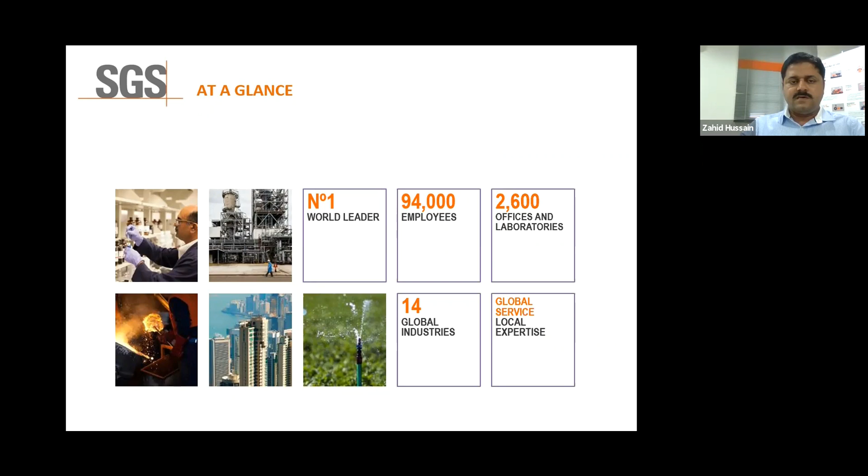SGS started in 1878, initially in the field of grain inspection, and then later on we entered the oil and gas industry, civil infrastructure industry, and other different types of multiple service lines. From 1878, we grew up, and now we are present almost all over the continents.

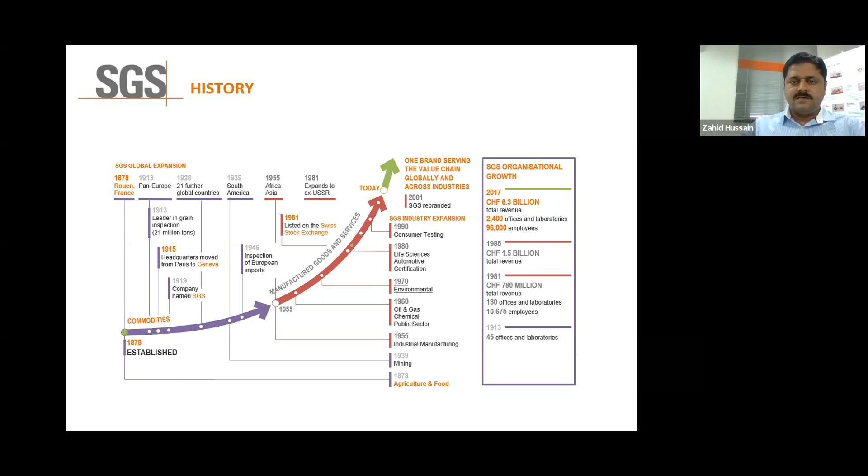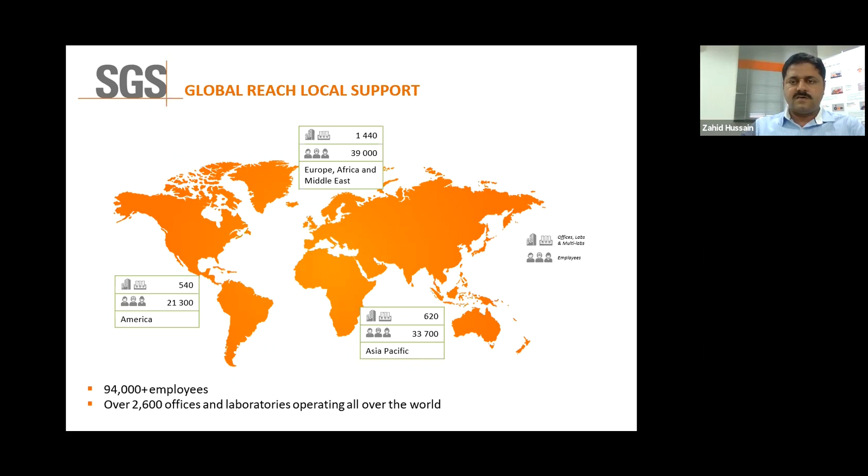This is SGS presence on the globe: in America, Europe, Africa, Middle East, and Asia, Asia Pacific. We have almost more than 94,000 employees working with us, and we have 2,600 plus offices and laboratories.

Our today's topic is our SGS consulting services in health, safety, and environment, specifically with respect to process safety. In SGS, we have hundreds of employees who integrate the HSE team within the environment and industrial division in different countries, covering all aspects of environment requirements, occupational health and safety requirements, industrial hygiene, machinery safety, construction safety, and process safety.

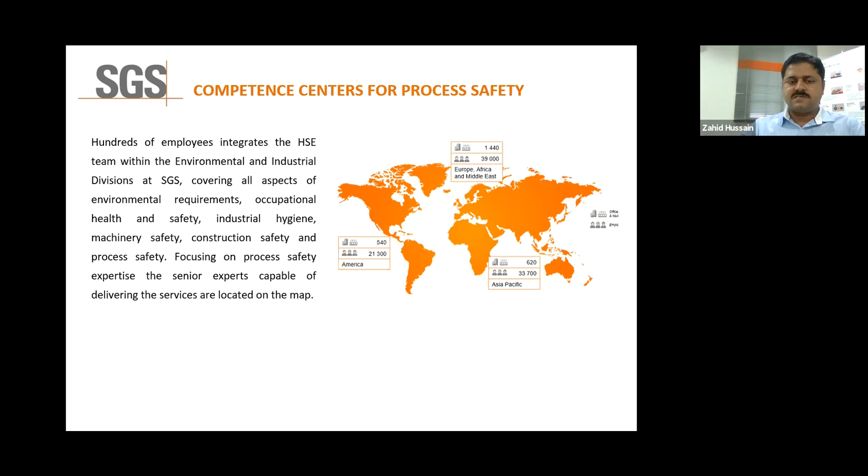Focusing on the process safety expertise, the senior experts capable of delivering the services are located on the map. So we'll start from process safety. So what is process safety?

Basically, in SGS, we provide these services in the field of process operations to prevent and mitigate the risks resulting from the operation of industries where production, handling, storage, and disposal of hazardous substances take place.

Our services cover the overall life cycle of the project, starting from the conceptual design, FEED, detail engineering design, and construction, operational, and decommissioning phase. So overall process safety services cover the entire life cycle of the project, and since we cover the entire life cycle of the project, we have to cover the entire life cycle of safety also. So it's called process safety.

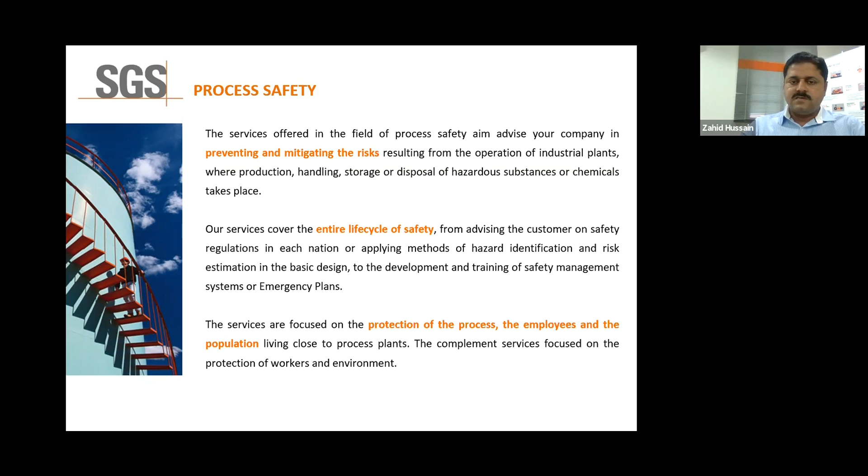Basically our services are focused on the protection of processes, the employees, and the population living close to the process plants or industrial areas. We also have to take into account that the safety of society is considered while performing process safety services.

So this is overall a brief of process safety, which covers process protection, public protection, and worker protection. We start from process hazard analysis in process safety, and for public and worker safety, we have to perform quantitative risk assessment and occupational health and safety services.

There are other multiple types of studies also involved, just like safety cases, emergency response management systems, emergency response plans, consultancy and other services, ATEX zoning, hazardous area classification, etc.

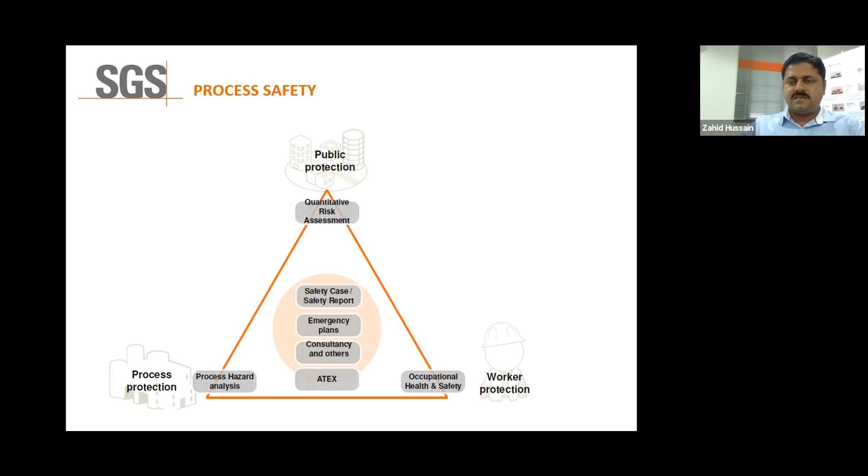Summary of the services in process safety studies: first, as I discussed, is PHA, process hazard analysis, that's like hazard safety studies. Then risk assessment, which involves qualitative or quantitative risk assessment, just like QRA, quantitative risk assessment, IR, individual risk, ALARP, as low as reasonably practicable. So we have to perform risk assessment in both ways, either qualitative or quantitative.

Then safety reports, analysis reports, safety management studies, and safety trainings, etc. And then functional safety, it contains a SIL assessment study.

Basically, safety integrity level study, and spill, dispersion, fire, and explosion modeling, hazardous area classification, just like ATEX and DSEAR classification and verification for dust and vapors, emergency planning, emergency response plan preparation, and obviously accident and incident investigations.

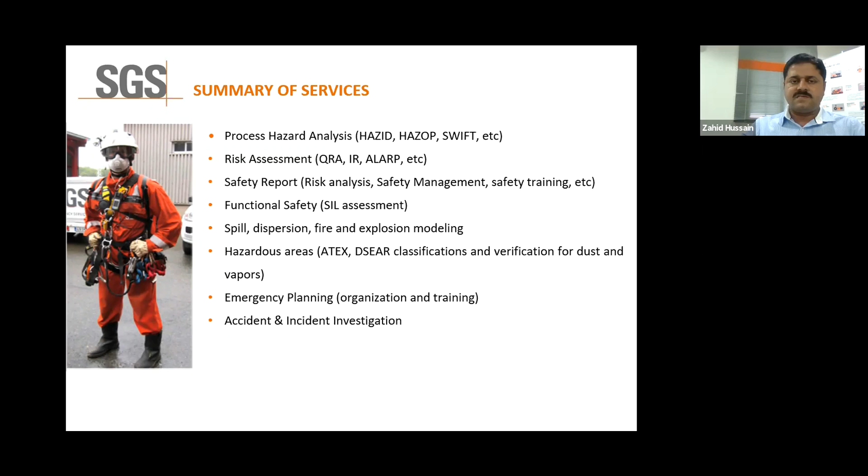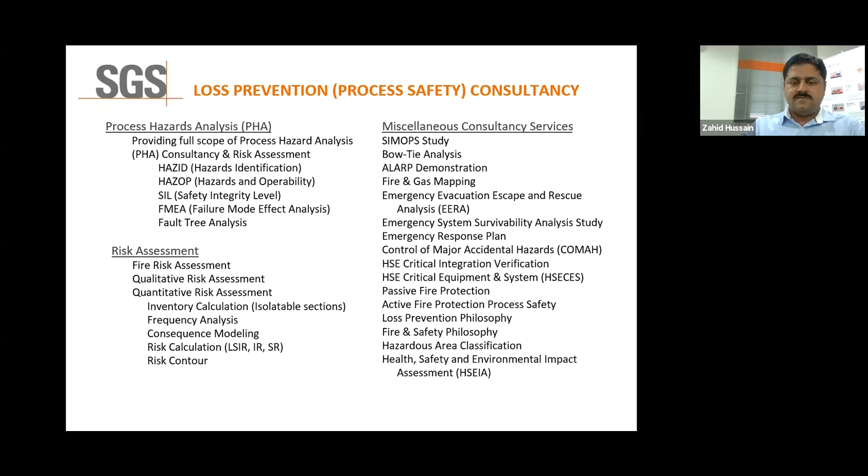This is the overall services of loss prevention and process safety consultancy, as we provide from PHA analysis to risk assessment, and then miscellaneous consultancy services. We will describe each in detail one by one in our today's session.

So first, PHA, process hazard analysis. What is PHA? Basically, a process plant, as you are familiar, comprises many complex systems and components such as instrumentation, controls, safety devices, etc. If all these components are combined together and work effectively, it means your system is sufficient and you are eliminating the hazard.

But in an ideal case, things work as intended. But in an actual scenario, if such components deviate from their intended purpose or design intent, maybe due to malfunction or human error during normal operation, plant startup, or plant shutdown, this can cause or be the reason for potential hazards or risks.

Therefore, there is a need to investigate how the plant responds in such scenarios. If a main component of the plant or system malfunctions, or if any human error occurs, then what could be the hazards or risks involved.

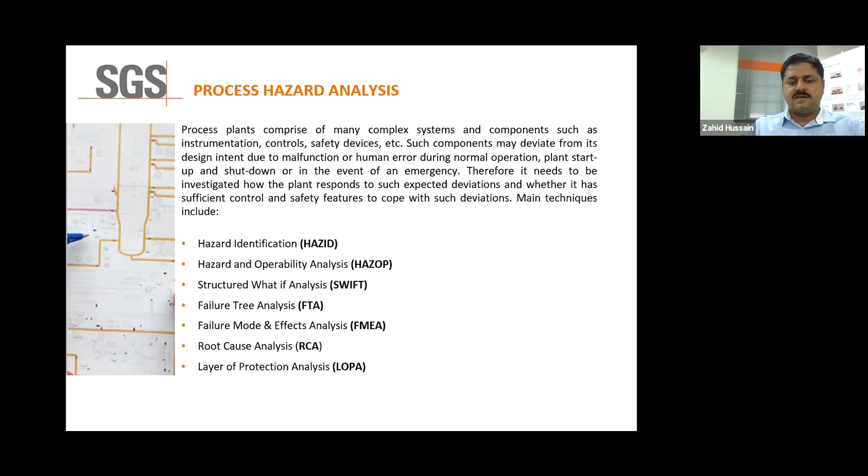In PHA analysis, we perform hazard identification, hazard study, and hazard and operability analysis. Hazard is basically related to operational hazard activity, structured what-if analysis, then fault tree analysis, failure mode and effect analysis, root cause analysis, and layer of protection analysis, LOPA, which is part of the SIL assessment study.

Now, as I explained, what is this PHA analysis study? Basically it is a structured brainstorming technique involving a team of experts covering all aspects of operation and maintenance, instrumentation, safety, etc., of the overall process of the plant.

Either it's in the FEED stage, detailed design stage, construction stage, commissioning, startup, or normal operation, it has to be performed throughout the life cycle of the project, from feasibility and front-end engineering design, then detailed engineering design, construction, commissioning, startup stage, and normal operation of the plant. So why is it to be performed, the PHA analysis or process hazard analysis study?

Basically, it is performed to find the deviation from design intention, to identify the hazard, so that we may know that all the appropriate safeguards are already in place.

There are normal steps for how we perform this PHA analysis study. As a standard protocol, we have to collect all the available information, just like all data, piping and instrument diagrams, PFDs, process data sheets, process equipment data sheets, and operating and design process parameters related to all the information.

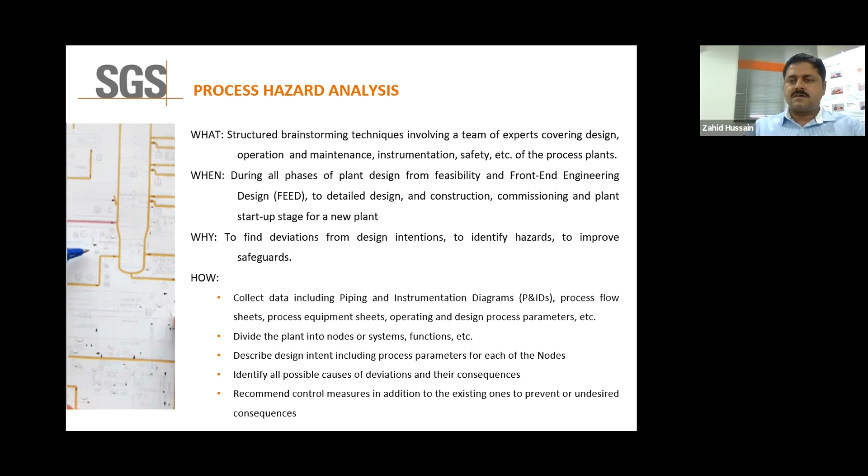Based on those deviations and consequences, we have to recommend some control measures in addition to the existing controls already in place, to prevent the undesired consequences.

And next is the quantitative risk assessment study. Based on the PHA analysis, normally in PHA analysis we perform all the qualitative risk assessment techniques. After adopting the qualitative risk assessment technique, we have to perform the quantitative risk assessment study.

Basically, a detailed quantitative risk assessment study is carried out to guarantee that the population, environment, and facilities protection with homogeneous criteria is being ensured.

So SGS provides the services of QRA studies, quantitative risk assessment studies, by professional use of state-of-the-art software tools recommended by clients, or if those are not specified from the client side, then SGS proposes them by itself.

And calculation according to the most recognized guidelines and methodologies as approved from the client, and then adaptation of local requirements and guidelines as well. And if those guidelines are also acceptable to the client, we have to adopt them.

Then based on the initial calculation, we perform consequence modeling and then frequency estimation according to prestigious databases, just like the Yellow Book or other available techniques, records of incidents or accidents on-site at the client premises if they are maintaining their own database, that we have to adopt. Otherwise, we follow applicable international best practices.

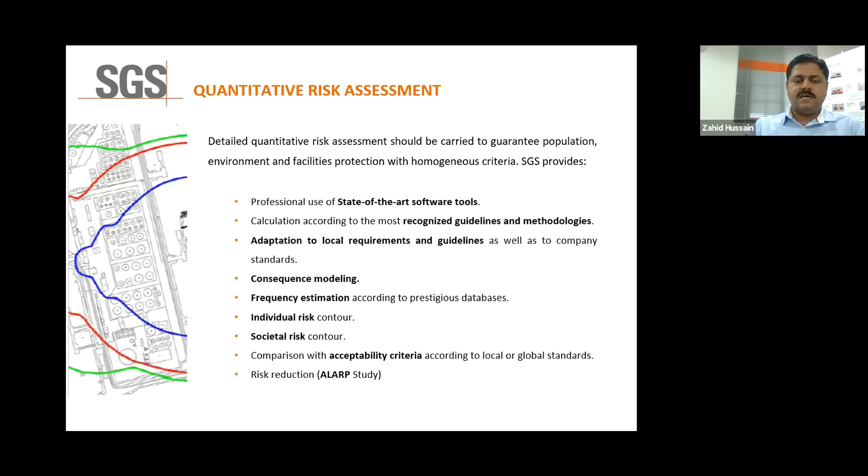Similar to PHA, these questions are normally asked: when do we have to perform the quantitative risk assessment study, and basically what is it? As explained, it is a method used to quantify the risk generated by any industry in case of loss of containment of hazardous substances.

This study is performed during all phases of the plant or project life cycle, just like the FEED stage and detailed design engineering stage. If the plant is in operation, some clients recommend redoing this quantitative risk assessment study every 5 years, because as a standard industrial practice, modifications or developments happen at each plant. That's why detailed PHA analysis and quantitative risk assessment studies are performed again after every 5 years of the previous study, to check if any revamping or modification of the facility has been done, so that safety is not compromised. So again this PHA cycle is performed.

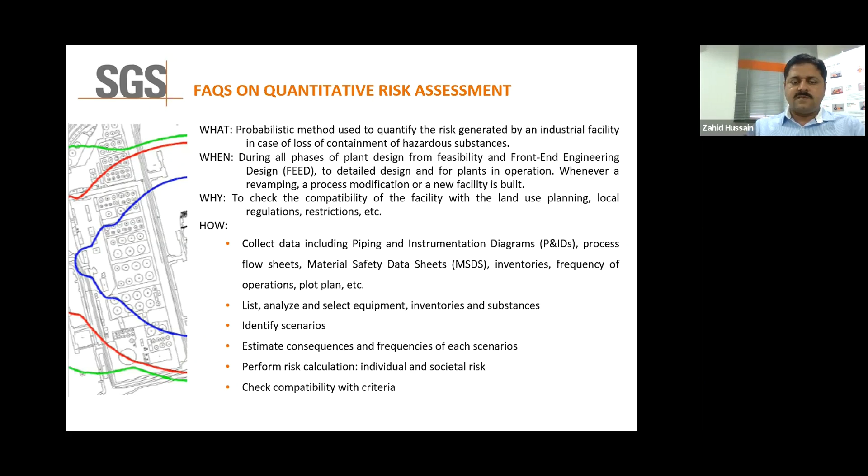We mark the inventory, and based on the inventory analysis or calculation, we identify the scenarios. Then we estimate the consequences and frequencies, such as failure frequencies, for each scenario. We perform the risk calculation, either individual risk or societal risk, and then check compatibility with the criteria defined by local legislation, as well as in line with the client's standard procedures or guidelines.

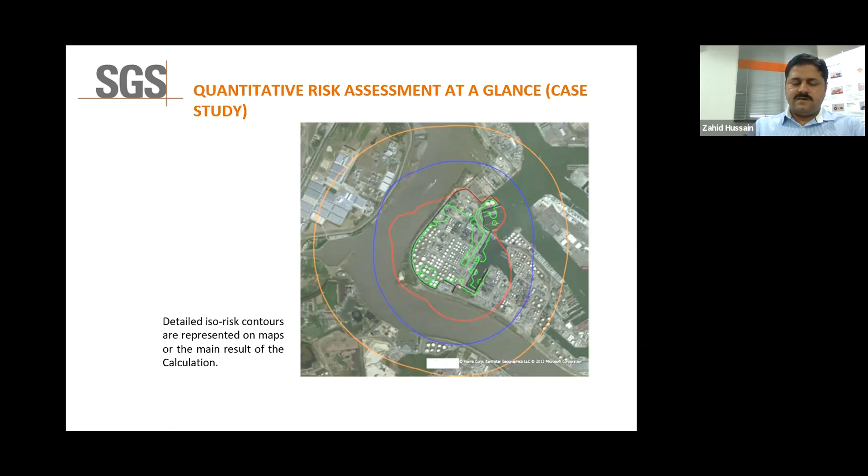About our services: next is the safety cases, safety reports, like control of major accidental hazard analysis. Control of Major Accidental Hazard directives were established and developed in Europe after the disaster at Seveso, which took place in 1976. The plant was located almost 20 kilometers north of Milan, Italy, and they were storing a huge quantity of flammable hazardous material when this incident took place.

After that incident, the government established some guidelines and directives, and based on those directives it's now applicable all over the globe that wherever there is storage or handling of large quantities of hazardous material, we have to perform this control of major accidental hazard analysis study in detail, considering the amount of stored hazardous material.

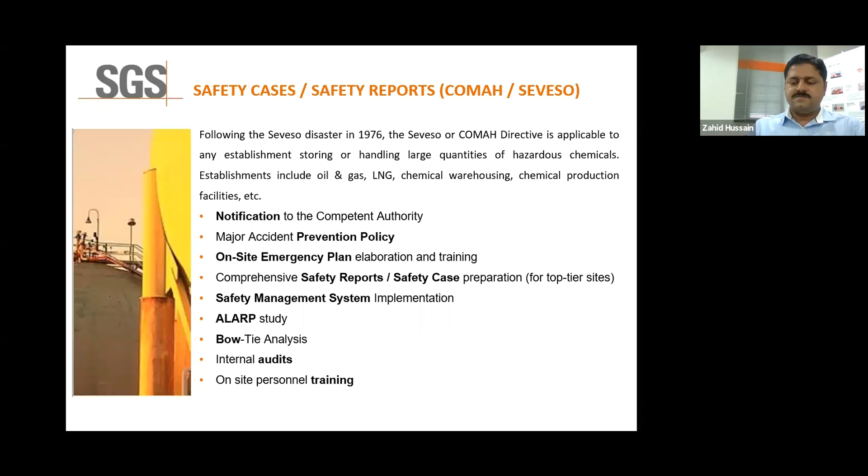Basically, COMAH comprises the PHA and quantitative risk assessment study, focusing only on the major hazards identified during process hazard analysis. Then we perform the ALARP and bow tie analysis of those major accidental hazards, and define the internal audit protocol. If applicable, we perform internal audits and on-site personnel training. So SGS is providing all these services for control of major accidental hazards.

So same like that, when this COMAH study or safety case study is to be performed, basically what it is and why it is to be performed is the same - a method used to quantify the risk generated by industry in case of loss of containment of hazardous substances, considering the major accident hazards. When COMAH is to be performed basically depends upon the local legislation or the client's standard procedures or guidelines.

Just like here in UAE, we are performing the COMAH study of each plant after every 5 years. So after a 5-year interval, it is mandatory that we redo the detailed assessment of all identified major hazards.

How we perform this control of major accident hazards is the same technique - first we have to collect the available information, just like material data sheets and overall frequency of the operation, plot plans, procedures, and then describe and list out the equipment, inventories, substances, identify the scenarios, then consequence estimations, risk assessment, safeguard implementation, demonstration, and then we have to perform the ALARP demonstration.

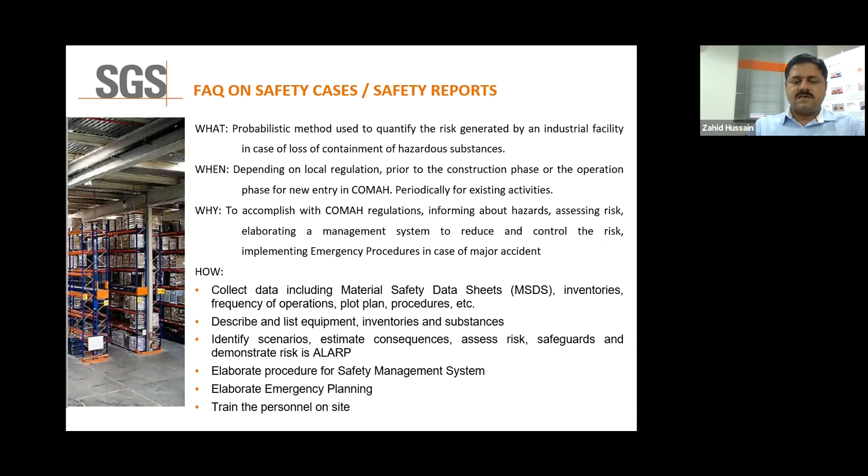Then elaborate procedure for safety management system, emergency planning, and obviously training of the personnel on site.

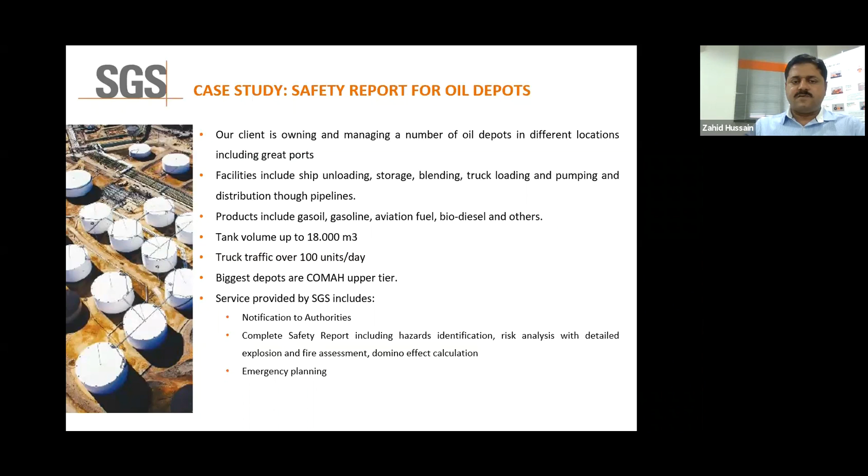Our services included notification to the authorities and a complete safety report, including hazard analysis, risk analysis with loss of containment, explosions, fire risk assessment, and overall layer of protection demonstration. And then we developed an emergency response plan for this site and provided training to their personnel.

So next is functional safety study based on IEC 61511 or ISA 84. Functional safety is focused on the specification, design, installation, operation, and maintenance of the safety instrumented system.

So once we perform this functional safety of a plant, then confidently we can say that we are able to maintain the process in a safe way, because during this study we estimate in detail the overall safety integrity level of the instrumented system, the overall instrumentation of the plant.

So relevant standards applicable are IEC 61508 or IEC 61511, ISA 84, and if locally applicable standards are developed by the client or by local legislation, we have to adopt those also.

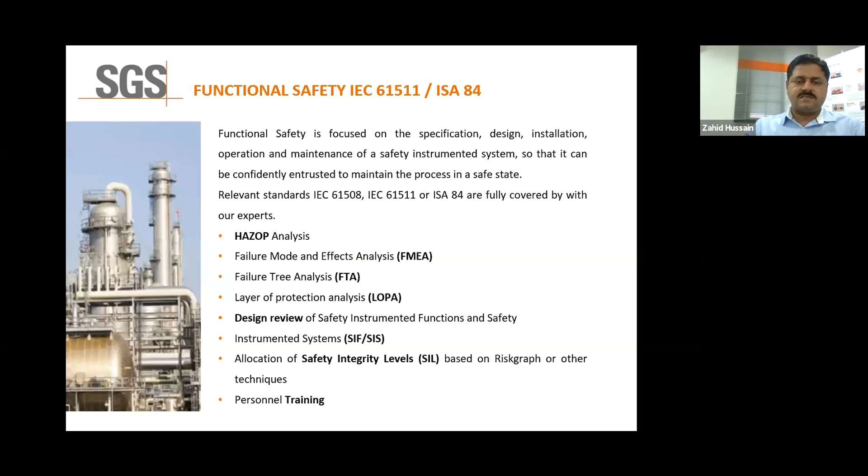For functional safety analysis, we initially perform HAZOP analysis, and based on that we calculate failure mode and effect analysis, fault tree analysis, layer of protection analysis, and then we provide services for design review of safety instrumented functions and overall safety instrumented systems like SIF and SIS, allocation of the safety integrity level based on the risk graph or other techniques as approved by the client, and then again personnel training.

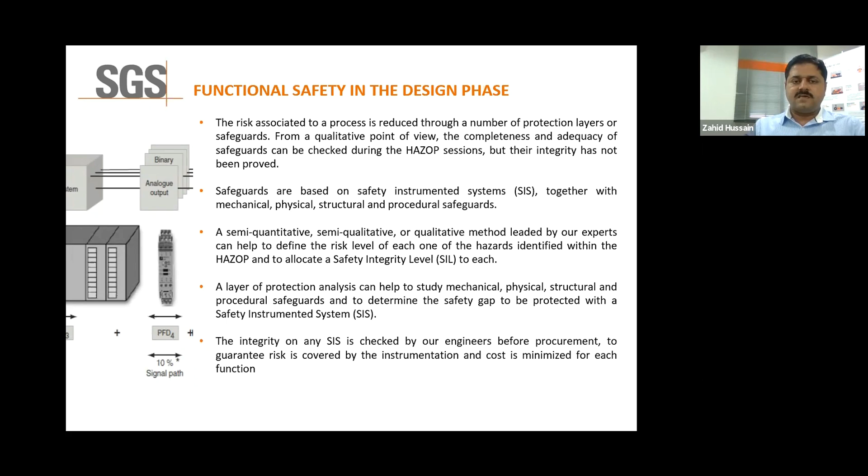So these safety instrumented function related studies are normally performed during the design stage of the project of the plant, but during the life cycle of the plant or in operational phases, these studies are also performed, as I explained, due to modification, revamping, or if there are any changes in the system, or if any new technology is adopted during the operation phase of the plant. Then again, just like COMAH, functional safety studies are also performed for all operational facilities, normally with an interval of 5 years, but it varies from client to client as per their applicable procedures or standards.

Next is spill, dispersion, fire, and explosion modeling. SGS is also providing services for dispersion analysis, fire and explosion modeling studies, and spill management related consultancy studies.

Normally, when manipulating hazardous material, any loss of containment in your process can lead to disastrous consequences for workers, population, environment, and overall facilities due to the spillage. If gaseous clouds are developed or fire or explosion happens, then obviously it would lead to a big disastrous event.

That's why, to prevent and to ensure that all appropriate control measures and safety features are already installed, we have to perform dispersion study and fire and explosion risk assessment study or modeling studies.

In this spill, dispersion, fire, and explosion modeling, we provide services calculating the release rate from atmospheric or pressurized vessels or containers, then consequences of pool fire for any liquid or liquefied gases, dispersion of flammable or toxic gases, gas cloud explosion or bursting of pressure vessels, and dispersion in building emissions from scrubbers or any other ventilation system.

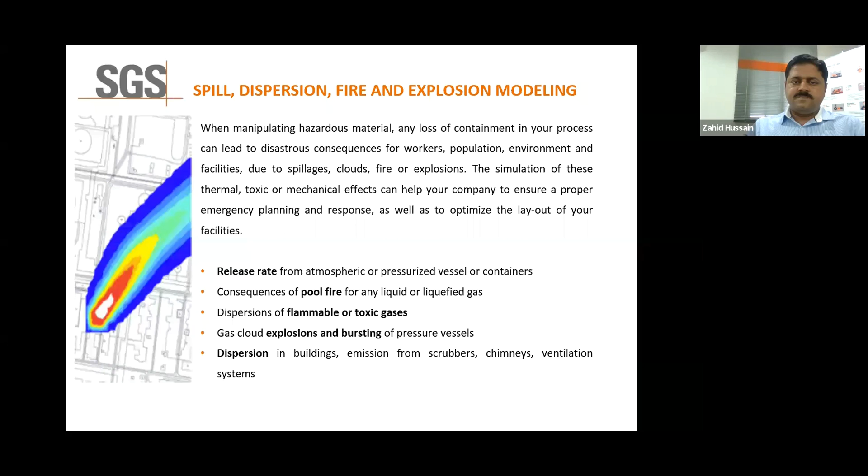That we are also providing our services. Just like explained in this slide, we perform hazardous area classification or ATEX engineering consultancy, on-site inspection of Ex-rated equipment, hazardous area classification for existing plants, third-party ATEX audit, Ex-rated equipment certification, and explosion risk assessment, like explosion protection document, then training for all these subjects, and personal competency certification issue.

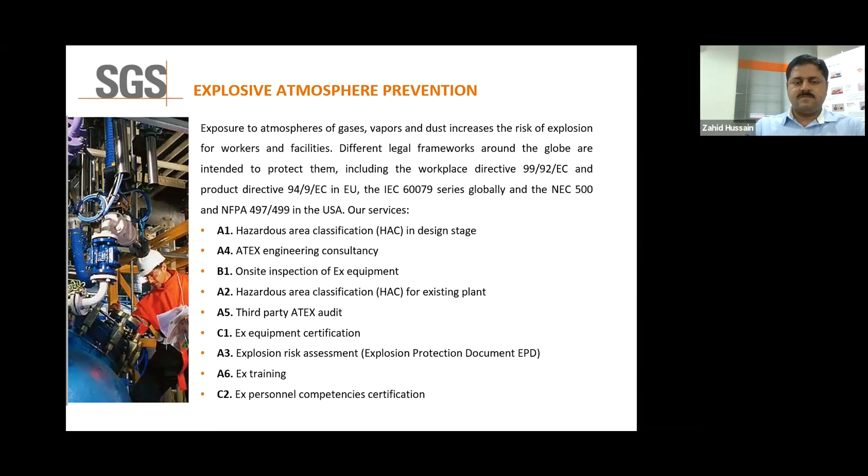SGS is providing all these services. If you are confused about these tags, what's A1, A4, we have segregated them so from A1 to A6, our EHS division provides services like hazardous area classification in design stage, hazardous area classification for existing plant, explosion risk assessment, explosion protection document, fire and explosion engineering consultancy, third-party fire and explosion audit, site surveys, and fire and explosion related trainings.

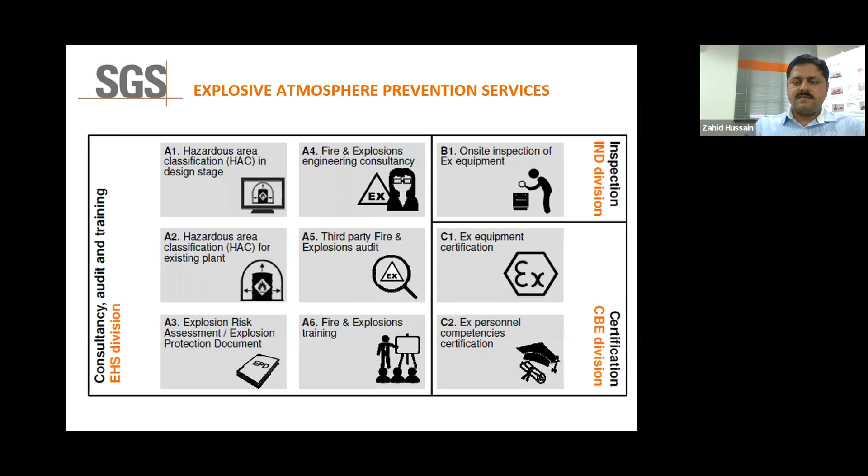In SGS, we have an EHS division, and on-site inspection of the Ex-rated equipment is provided by our industrial team, and certification of Ex-rated equipment or personal competency training certificates are issued by our CBE.

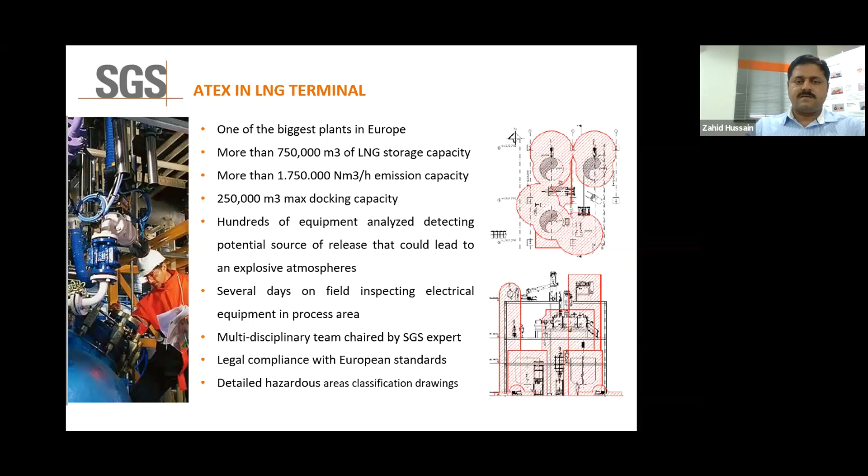It's one case study performed by SGS for one of the biggest plants in Europe, an LNG terminal. They have performed the dispersion modeling, you can say overall explosion risk analysis.

Next is emergency planning and emergency response. Obviously, based on PHA analysis, further quantitative risk assessment studies, or control of major accidental hazard scenarios, if we consider that all control measures are appropriately in place and functioning accurately, still, in case of any emergency, the main priority is to protect human life, and that's why we develop a plan for emergency scenarios.

First, how we have to protect our facility, how we have to protect our personnel and workers at the facility, and how we have to protect the overall society from any type of risk or hazardous event.

So for emergency planning and emergency response, several standards and regulations require the elaboration and implementation of a document regarding emergency organization in case of any accident or incident resulting from handling of hazardous substances—it could be toxic gas releases, flammable material spillage, or if flammable gases are there, cloud development or explosion scenarios.

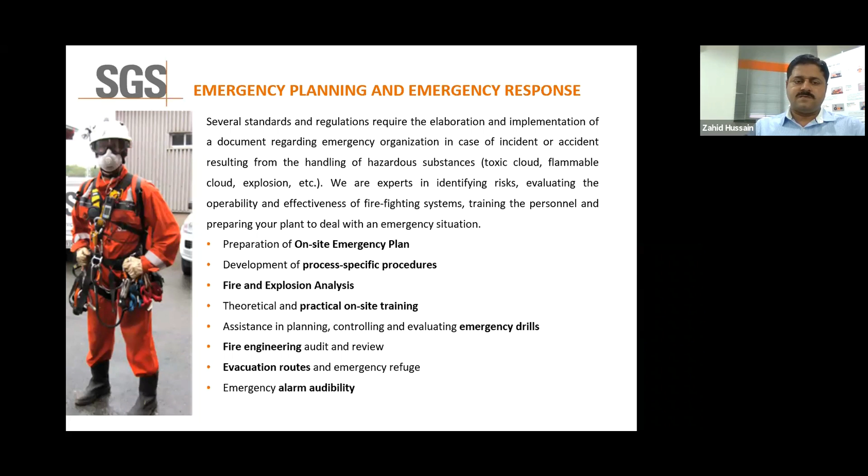So in case of any emergency, whatever the requirements are, SGS provides all types of these services. And if any accident or incident happens, for accident and incident investigation, SGS is also providing these services.

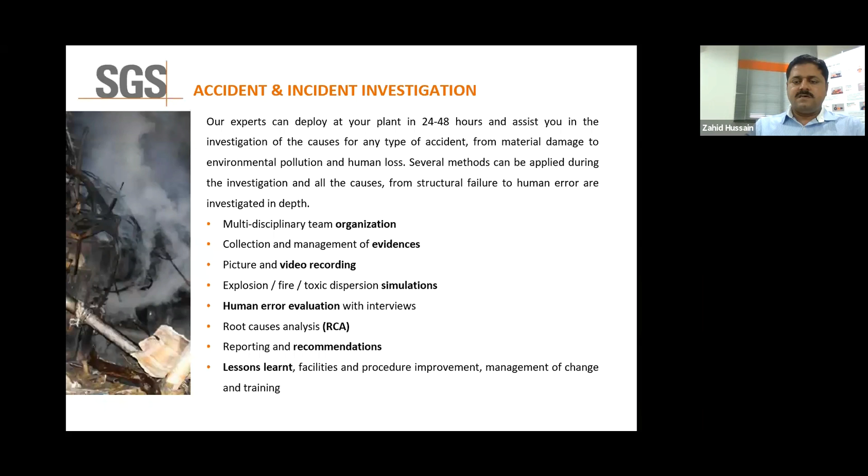SGS also shares some lessons learned, and we check previously occurred accidents or incidents at any facility or client premises. SGS also provides services for overall procedural guidelines improvement, management of change, and training related services.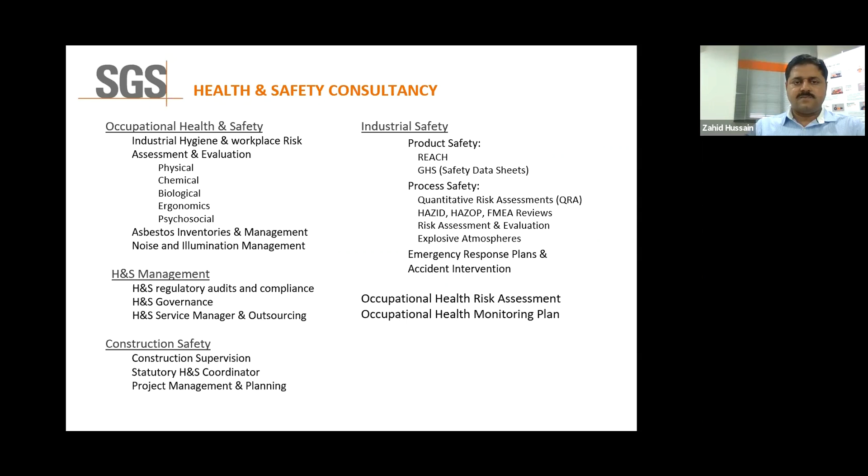There is a question: please explain fire engineering audit. Which technical standards have we followed for fire engineering audits? It actually varies from client to client, but normally the best internationally acceptable standards are NFPA, and we also check if there is any information provided in API standards, client guidelines, client procedures, or local legislations. So it varies from country to country, but internationally acceptable procedures and standards are from NFPA.

Another question: what is the best time to carry out the hazard study - during pre-construction or during the operation phase? As I explained, hazard study is PHA, process hazard analysis. This is to be performed during all phases of the project life cycle, from conceptual design, FEED stage, detailed design engineering stage, and during operations also. Normally the best practice is that a brainstorming session for hazard identification is organized during the conceptual design or early stage of the design.